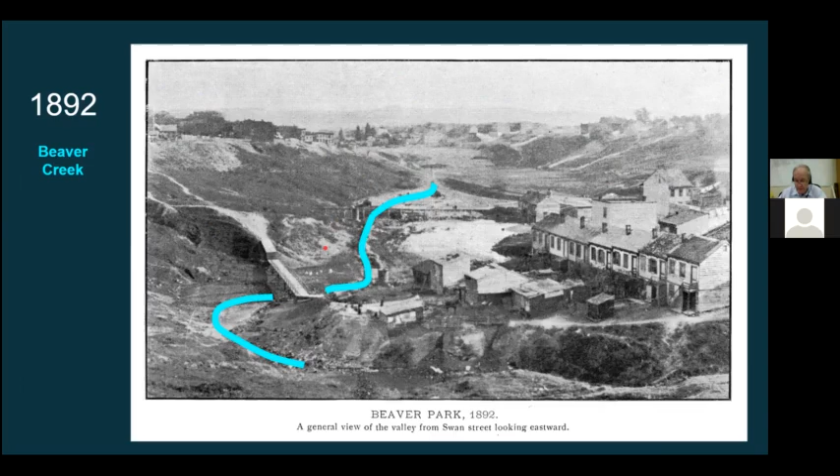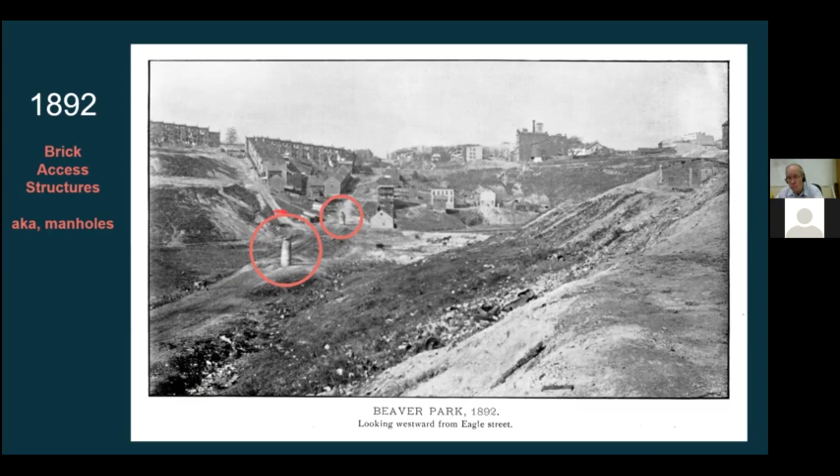And Beaver Park was used as brickyards and breweries and was considered an unsanitary mess by the community. But then look, postcard of Beaver Park. We can see underground, we can see these brick access structures where the beaver kill run has been put underground in 1892. And now we're seeing a shift in sanitation for the region. So now going back to our 1914 postcard of Beaver Park, we see the park not only has become an asset to the community, but featured prominently at the base of this postcard is a stormwater catch basin.

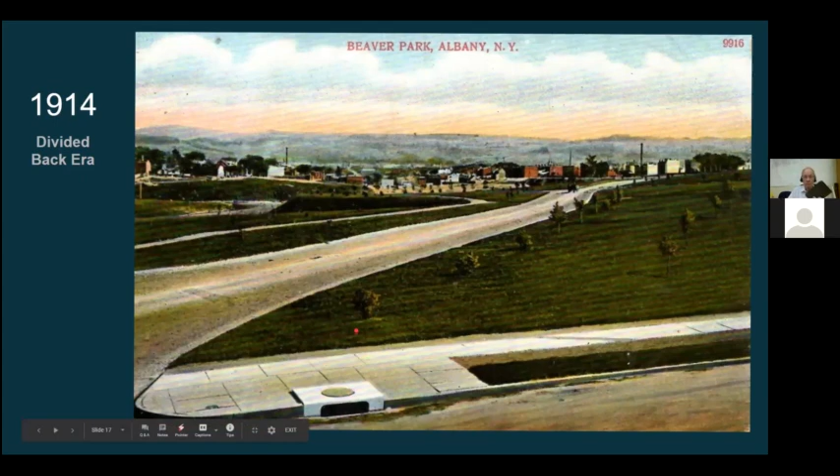Now this catch basin could easily have been excluded from the image, but it's kept on purpose because, like the courthouse and the steamer and the post office, this catch basin is important to the people of Albany, featured on their postcard in 1914. Now see what happens as we move forward in time. We get to 2014, 100 years later, our catch basin's the same catch basin, still cranking away, doing its job, but the world around it has changed.

So the point I was trying to make as we walked through Albany's journey to a modern watershed is that stormwater is an important part of the community here. But now we start Albany's journey to a smart watershed. So we see the same community, their combined sewer trunk line in green. Washington Park, with Washington Park Lake, sits upstream of Beaver Park, which has since been named Lincoln Park.

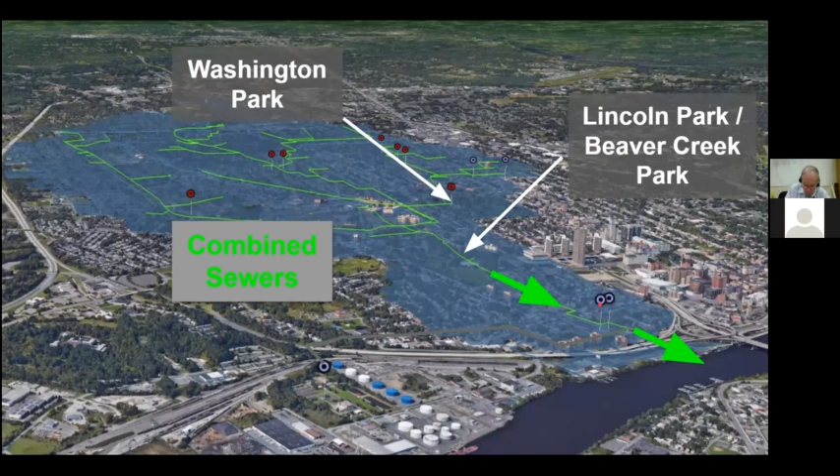We can see that water is being diverted by the interceptor to the wastewater treatment facility. We see a regulator outfalls combined sewage to the Hudson River when flows exceed the plant's capacity. They call this outfall Big C. And this is the most popular one in Albany, again, carrying that 250 million gallons of combined sewer overflow every year.

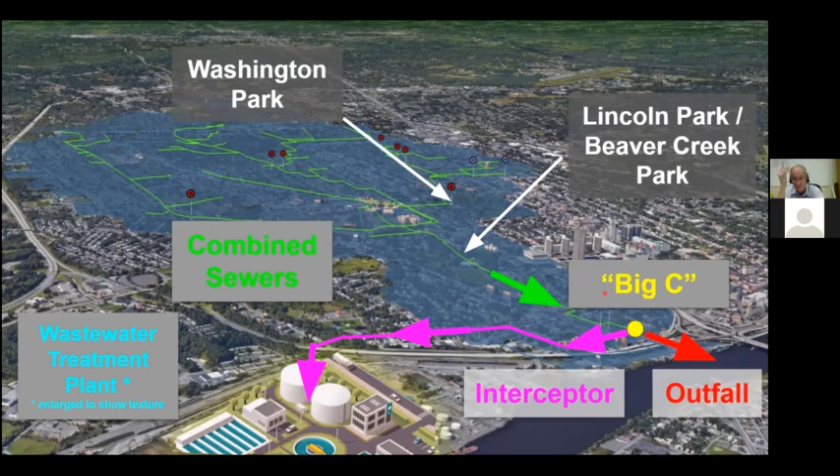And this is what Albany's watershed looks like now. Now, after some consideration, Albany realized there's more they can do with their infrastructure to mitigate flood risk and reduce CSOs. So we partnered with them. We looked upstream at ways to optimize their system. Us, the city, their consulting partners

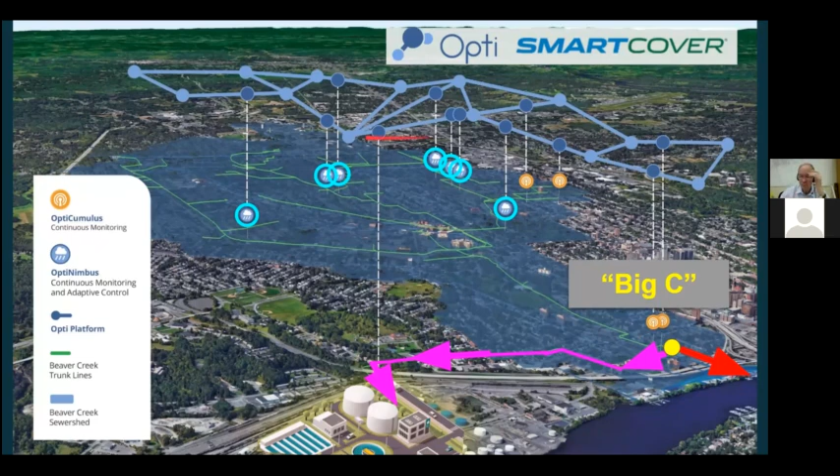identified a number of stormwater storage facilities, including Washington Park Lake right here, that can be controlled. And I'll talk about what I mean by control. I'll also note that SmartCover is a partner of ours. They're monitoring information downstream at the interceptor here, so that information becomes available with the control of these upstream sites.

Now, by control, I mean continuous monitoring and adaptive control, where information is leveraged, like the local weather forecast, downstream flow data from SmartCover, to automatically control the timing and rate of flow through assets like Washington Park Lake.

And the way this works is cloud software ingests the data and information, compares what is currently happening in the system to what has happened in the past and what will happen in the future by calculating runoff and estimating what stormwater runoff is going to enter these facilities. And then the software system drains stormwater facilities in advance of storm events to create capacity by actuating a valve or a gate in real time.

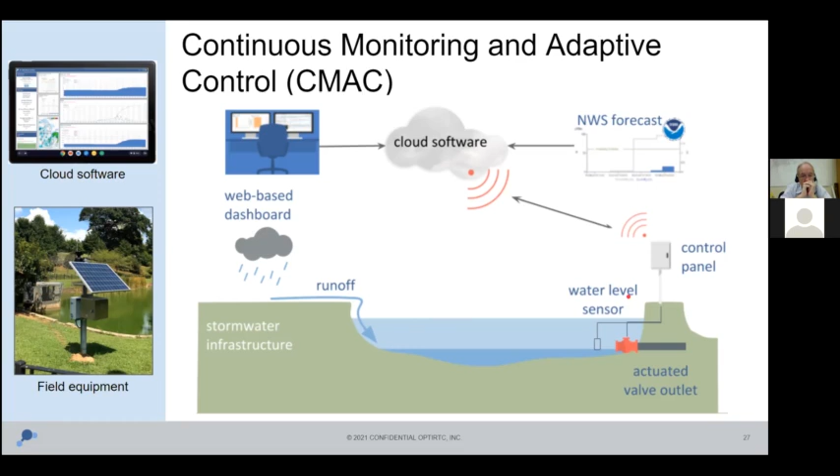So this is how these assets like Washington Park Lake and others in Albany are adjusting in real time and working smarter. Now, the equipment they use is third-party off-the-shelf actuators, valves, and sensors. Some systems are solar powered, others are line powered. And again, this is happening in water and this is happening in wastewater. And we're just bringing this technology into stormwater, like Albany.

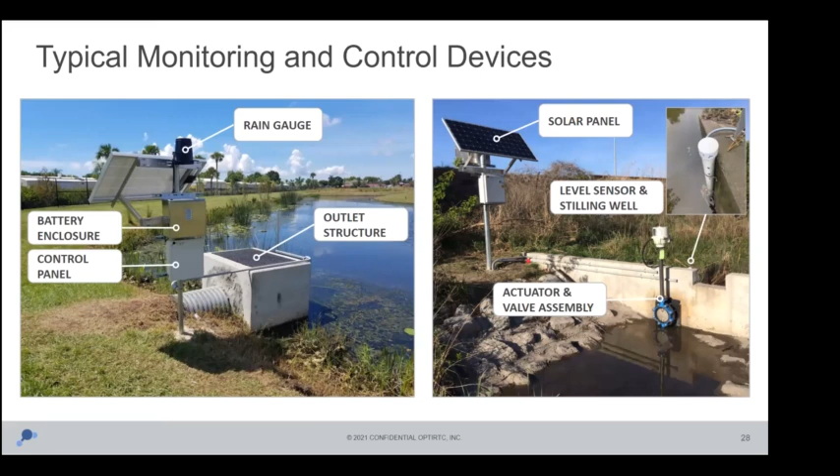The equipment ties into an online dashboard via cellular gateways pushing data up to the cloud. And then this gives operators and communities real-time insights into the performance of their infrastructure. Sites are operated automatically in response to the weather forecast and downstream conditions. So before storm events, a rainfall event enters the forecast period, runoff is calculated, and the sites are drawn down.

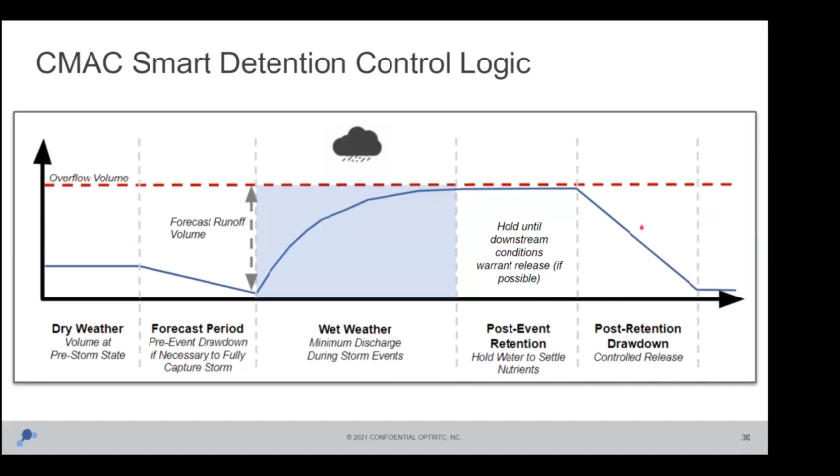During storm events, we're targeting zero discharge out of these facilities, so that, again, it provides some flood risk mitigation and then also gives the downstream system capacity or time to regain capacity, holding water after the storm event, and then slowly releasing during dry weather when the downstream systems can handle that runoff, that inflow.

And the operation seems simple, but there's a lot of complexity that goes into it. So for example, in a 24-hour period, there are 96 weather forecasts, over 4,000 input data points, and over 1,400 control decisions for a single facility. And now this gets multiplied when you have a network of sites working together like Albany.

And because the forecast and the system conditions are always changing, decisions to hold or release water are constantly updated as well. So every 15 minutes when another weather forecast comes out or when site conditions change, the decisions operating these watersheds are changing automatically.

So let's look at Washington Park Lake again. I mentioned this was upstream of the combined sewer and downstream of flooding, where you have flooding happening up here in these neighborhoods in the combined sewer trunk line. Well, now with adaptive controls, the lake can perform both functions, again, these competing functions. They can perform it in an optimized way without compromising aesthetics or recreation of the lake. And that's Albany enhancing existing infrastructure. They're saying, what can I do with the infrastructure I have to get more performance out of it?

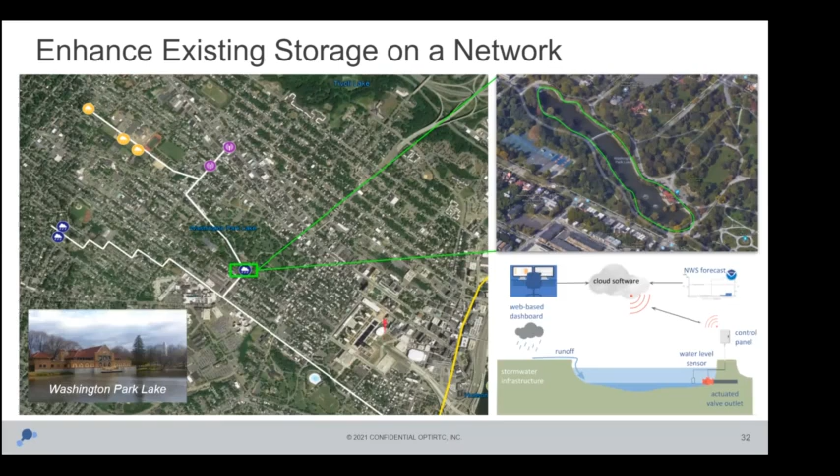Then Albany enhances new infrastructure. So like they have an underground detention basin under a ball field, and they have a constructed wetland in an area that has historically flooded and also discharges into the combined sewer. So by building this infrastructure to be controlled, they were able to optimize the performance for both flood mitigation and CSO reduction.

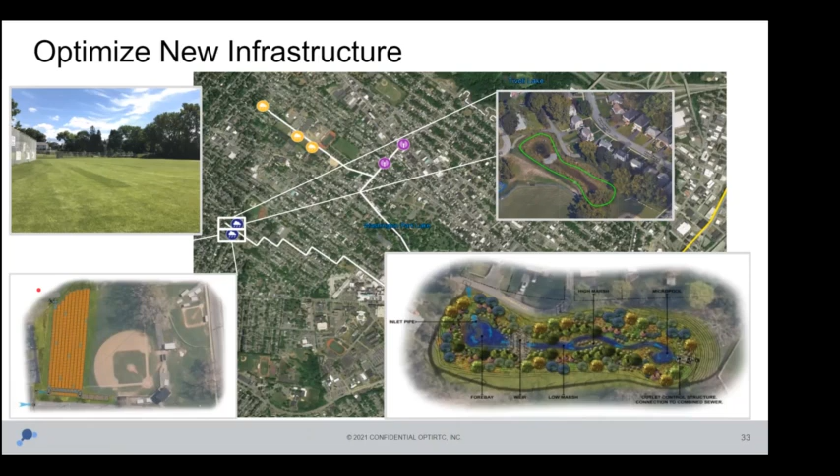And the other thing is now this detention facility can hold water during dry periods, and that water can be used to irrigate the ball field, for example. So it's this multi-use, multi-application infrastructure that's optimized to do more than one thing. And the great thing is it's delivering real results. So specifically, we track wet weather capture at the sites I showed in Albany's network.

Traditional passive infrastructure gets somewhere between 10 and 30% wet weather capture. And it does this by design because the infrastructure, when designed passively, is designed to meet the 2-year, the 10-year, the 100-year storm. Sure, we deal with this all the time, but by design, it's not optimized for any of that. It's designed to work well across a range of storms.

What active controls are doing, what these cities are doing with active controls, are optimizing the performance of these facilities for each individual storm event and saying, can my site be redesigned by changing an orifice size or opening a gate partially to increase that effectiveness? So it's taking this infrastructure from 10 to 30% effective to 80 or 90% effective. And it's doing this without building additional storage.

So they don't have to buy property and build new stormwater infrastructure. So it's a relatively small investment for a significant increase in performance. And in fact, Albany is getting about 100x return on investment here. So for every dollar they spend optimizing their assets, that's $100 they don't have to spend building new infrastructure to

achieve the same outcome. And now that's money put toward improving level of service, or money spent on education or healthcare, or money back in the pockets of taxpayers. I mean, that's improved quality of life that Albany is getting here.

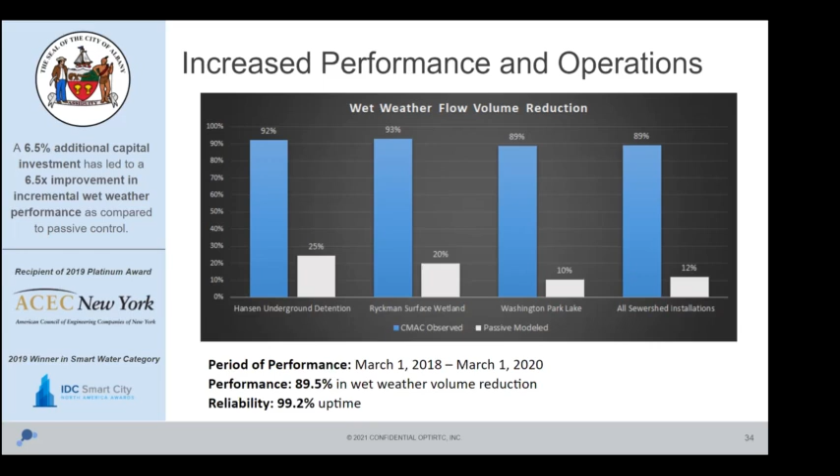So I want to move on to another case study on flood risk mitigation, but Charlene, I know you said this could be interactive. So if anyone has questions, or if there's anything we can talk about with Albany, I'm happy to pause for a few minutes.

I haven't seen any questions come through chat yet. Mostly it was about how cool those postcards were. It's cool, right? A lot of comments about that. I tricked you into watching a presentation on postcards. Well, it's really funny because I have my grandmother's scrapbooks and photos from years, from when she put them all together. And a lot of the writing in those older postcards were all in the front, and I had no idea why. So now I know. Divided back era, law changed in 1907. That is crazy. Okay, great.

Well, I'll move on if there are other questions about Albany. Looks like I do have one question. How would this work in sinkhole type watersheds? In sinkhole type watersheds. So the way this works is really just optimizing stormwater storage. So anywhere that you can store stormwater, you can optimize the timing and rate of release. So if you're storing stormwater in a place that's going to result in a sinkhole for some reason, then it's just something you would have to account for. But yeah, that's it.

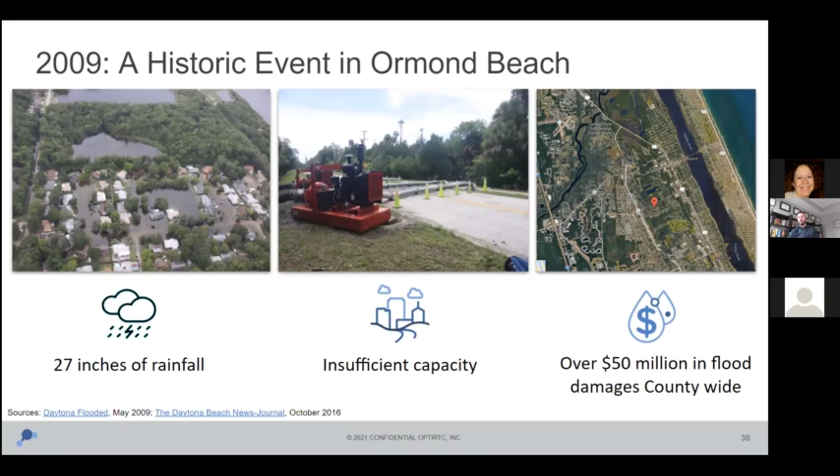Like everywhere else, they're seeing flooding, and specifically in 2009, Ormond Beach got 27 inches in 5 days. Now they've had hurricanes before. 2004 was a bad year, but this one made it clear that Ormond Beach's systems didn't have the capacity to capture the storm that resulted in over $50 million in damage in Volusia County. So again, that was 2009.

Now in 2014, the city looked at their worst hit area, which was around these 5 lakes in Central Park. They were separate lakes until they were connected in this $3.4 million project, which made these lakes into a single flood mitigation system, serving a drainage area of about 550 acres. There's a pump station at the end of Lake One that was a passive pump station at this stage of the project, pumped water into Laurel Creek, eventually to the Halifax River and the Atlantic Ocean.

And it operates like you would expect. When the water level gets above 3 feet, the pump kicks on, typical operation. But it became clear that this pump was not able to manage all 5 lakes effectively to mitigate the flood risk and increase resilience. See, it's these houses right here to the side of the lake that were the ones that were flooded in 2009. So again, the pump station was not made to manage the flow from all 5 of these lakes.

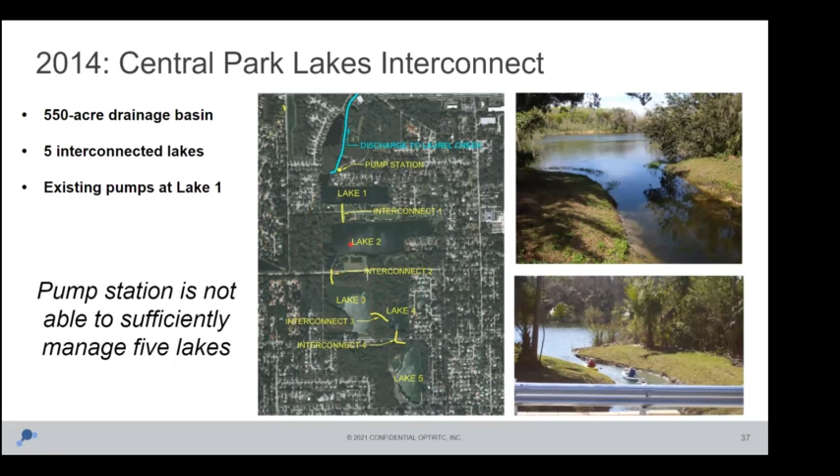So the city and their engineers were faced with a choice. They were either going to build another pump station to manage the lakes, or implement adaptive control software to watch the weather forecast, draw down the lakes well in advance of storms, and enhance their existing infrastructure. The first option was an $8 million investment. It's another large pump station for their community. The second option was about a $200,000 investment, so a significant difference.

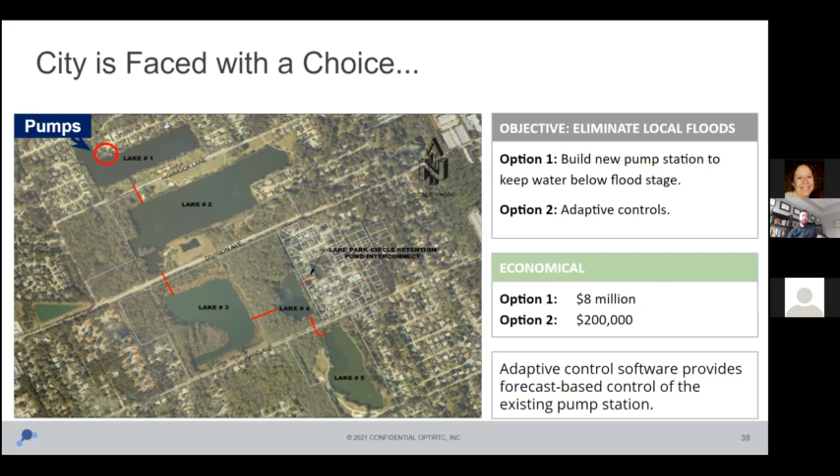So in 2017, the city implemented adaptive controls, like I described in Albany. This detailed site-specific operation was set up with the city and their engineers. There were over 100 different parameters, from watershed characteristics to forecast sensitivity, operational targets, that were established before the system was turned on and then optimized.

Now, this represents a paradigm shift away from the traditional process of model, design, build, and then maintain without any way to go back and change anything, to model, design, build, and optimize. So now we can see the way these systems are working and change the way they're designed just by changing settings in software.

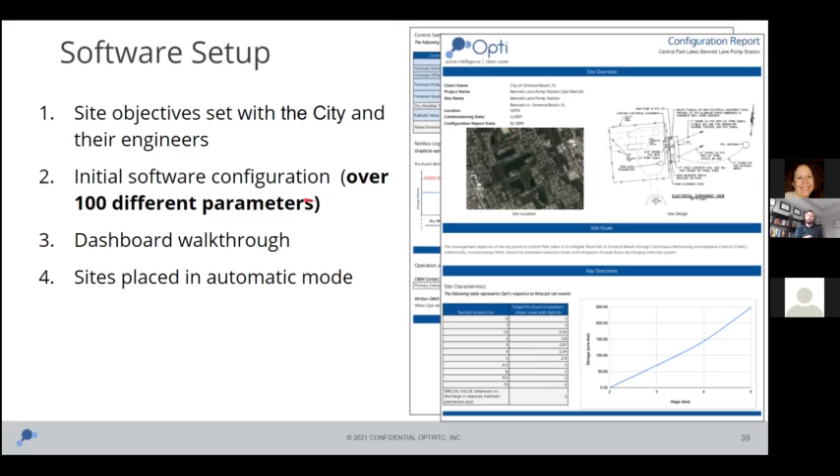And to give you some context on how this works in Ormond Beach, we'll take a look at Hurricane Irma. So Hurricane Irma came in 2017, just 7 months after the adaptive control system came online. Total of about $70 billion in damages, an estimated 82 fatalities. That was followed right there by Hurricane Jose, you can see on the right. I was watching the dashboard, the Ormond Beach's dashboard, that weekend from my home in Boston.

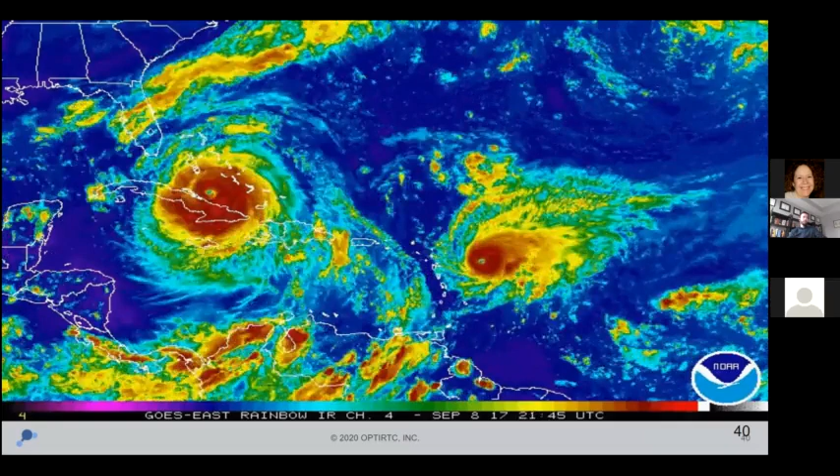And when speaking with the staff of Ormond Beach, they were asking themselves 3 questions. They were asking, what is the status of my stormwater infrastructure? What impact is expected? And how can my infrastructure be better prepared? And the great thing is they were able to get these answers by looking at their online systems.

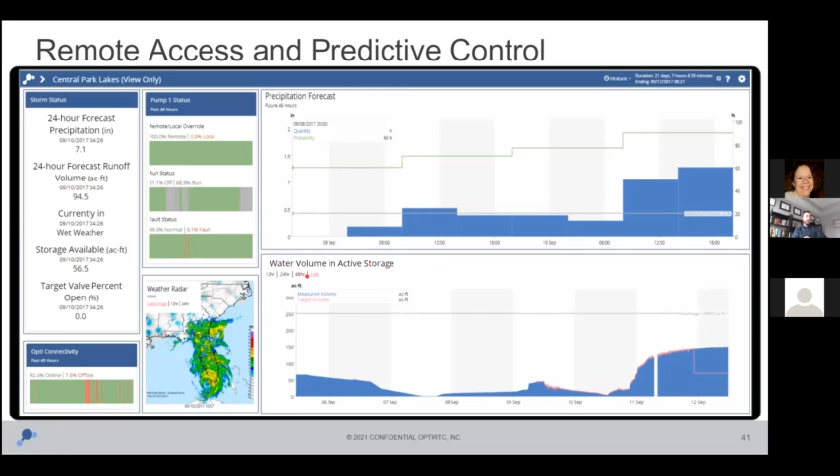So they saw the storm, they saw the status of their pumps, they saw the forecast and how it was evolving every 15 minutes. They saw they were expecting a runoff of 94 acre feet in 24 hours, to give you some context for this system. And they only had 56 acre feet available in storage. And they saw the pumps kick on to prepare for the storm. So the lake drew down 70 acre feet. They received almost 9 inches of rain, and the result was no flooding at the lakes.

And tracking the storm, looking at what did happen, in blue with adaptive controls versus what would have happened based on traditional operation, we see that the system likely mitigated flood risk. There would likely have been some flooding had the system not been kicked on and put into the pre-event drawdown.

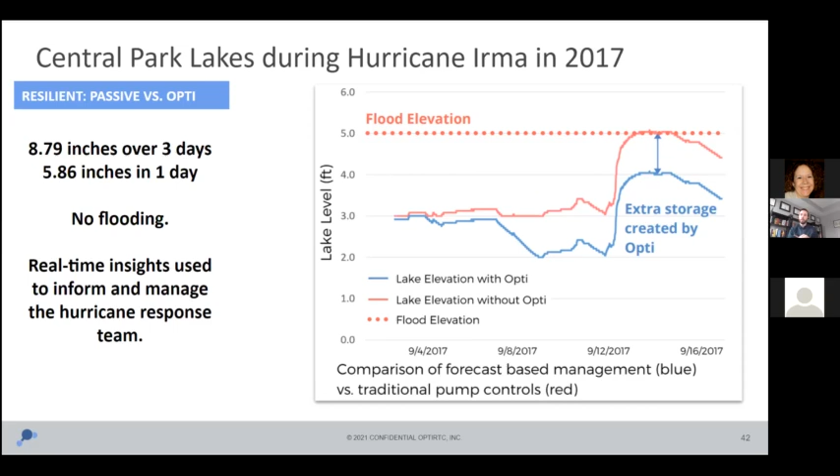And the biggest thing is now the city employees, this is what they were telling me afterwards. This is huge. The lakes were able to prepare, but the biggest thing is that the operators could see this and know what was happening remotely and really understand what was going on, so they could put their people, their most critical resources, to other areas of the city to prepare for this storm event, because they knew that the system had their lakes under control.

After Irma, the city decided they wanted even more visibility, so they added 2 upstream monitoring stations and 1 downstream of the pump station. They're monitoring water level and temperature using lightweight solar power telemetry. Trends are being tracked online. Data from each storm event is automatically identified and separated for easy analysis.

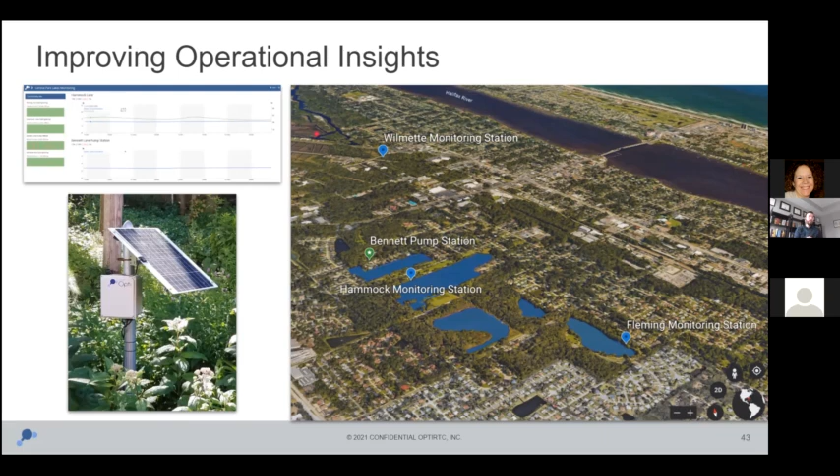So now before storms, the city can go back and check how their system responded to past storms with similar characteristics. So they can see, I'm getting a 3-inch storm event or a 4-inch storm event. How did my system respond to past storm events of similar characteristics, and does anything need to be changed? And the city did that before Hurricane Dorian in 2019.

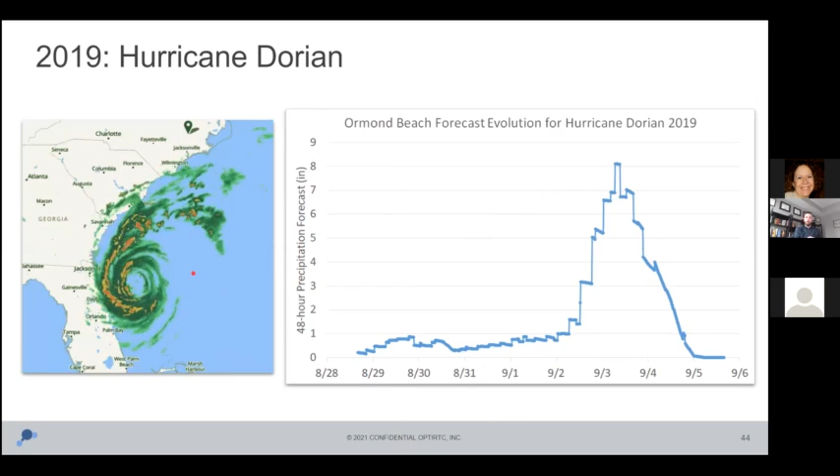So what I'm showing here on the right is the forecast evolution for Dorian in Ormond Beach. And at one point, it looked like the city was going to get another 8+ inches. Now, for those that remember, this storm had largely skipped Florida and headed up the coast, still resulting in $3.4 billion of damages. But Dorian was different for the city of Ormond Beach because they were much more aware of their capacity to take manual control of the lakes.

So coincidentally, I was in Florida meeting with Ormond Beach and a few other communities on August 29th before the storm. And the city engineer took manual control of the facility and drew it down as a demonstration, and then decided to bring the lake levels down slightly. And then the next day, August 30th, even though the lakes were forecast to have enough capacity, the city engineer drew them down because of some political pressure to avoid flooding, and Dorian looked like it was headed for them.

And even though the hurricane turned and Ormond Beach only received 2.5 to 3 inches of rain, this system gave the operators in the community peace of mind to know that their lakes were prepared. So the outcomes of this project really boil down to 3 things. One is economics, so saving in capital and operating expenditure by the city, enhancing their existing assets before building new.

Resilience, so the city created 70 acre feet of active storage capacity that's used to protect the community. It's almost the equivalent of building another 70 acre feet in storage. I mean, talk about Texas or other locations. It's difficult to find 70 acre feet of new storage. The city was able to do that with their existing facility. And then lastly, peace of mind. I mean, turning data into information and actionable insights.

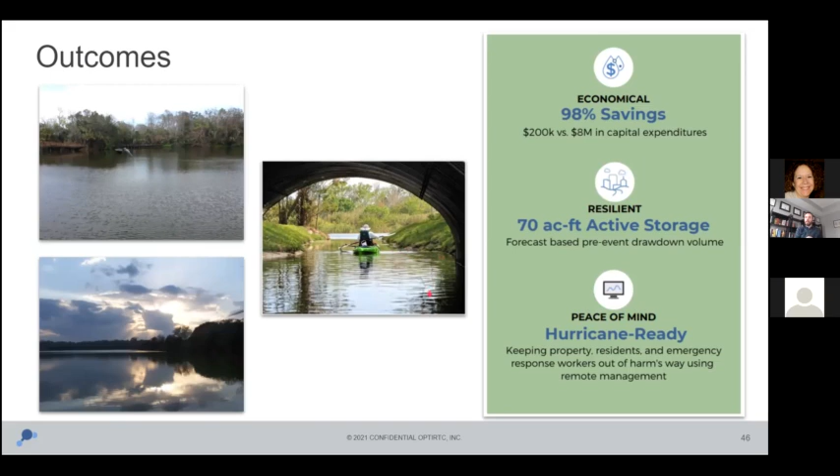So I have one more case study. Again, I'll pause here if there are questions about Ormond Beach or Albany or anything that's come through that we can discuss. I don't have any questions. I just had a comment that said I'm really excited to see more of this technology be applied to stormwater infrastructure.

Okay. That's all I have so far. Shoot. I muted you by accident. There we go.

All right, let's see if that works. It sounds like we're good.

All right, well then I'll go to the next case study. We've covered sewer overflows, we've covered flooding. I have this one more case study. It's on water quality and flooding. You'll see there's a multi-use application here in pretty much all of these case studies.

But someone did ask: where has this system been installed in Tennessee? So this system has been piloted by the city of Chattanooga years ago. So we did do a project there before Opti was even a company. Actually, there may be some folks from Chattanooga on the line, but I didn't really give an intro to Opti since this is more of a technical discussion about the benefits.

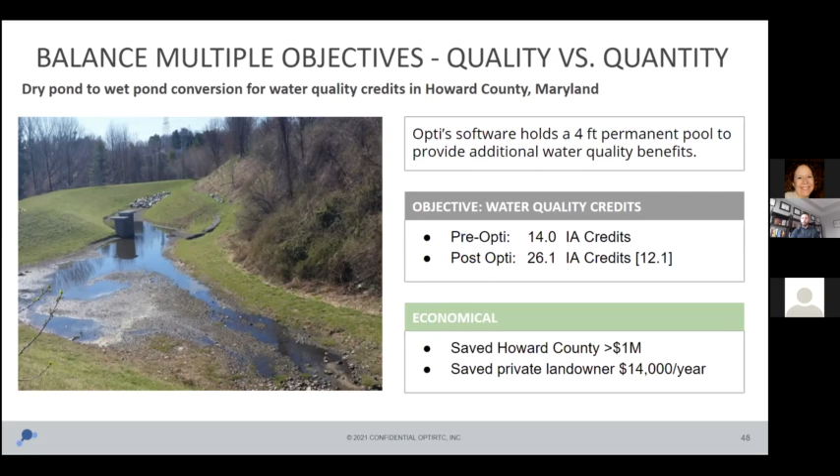And because this pond is on private property, the landowner also receives a stormwater fee reduction of about $14,000 per year. On the side, in Maryland, we've recently done a dry pond study where if you take dry ponds and you put active controls on them, they perform just like wet ponds without compromising any of the flood risk mitigation benefits, which is huge. I mean, think about Tennessee. If there are dry ponds out there providing flood risk mitigation, those ponds could be doing a lot more for water quality or sewer capacity issues with adaptive controls.

And the way this works for water quality is we talk about holding water during and after storm events. That increases retention time. And that retention time increases nutrient settling and improves water quality. So the water that's being discharged from these sites is either clean water before storm events because it's been sitting there for days, or clean water 24 to 48 hours after storm events. Again, because we're holding water during that period and allowing these sediments to settle out.

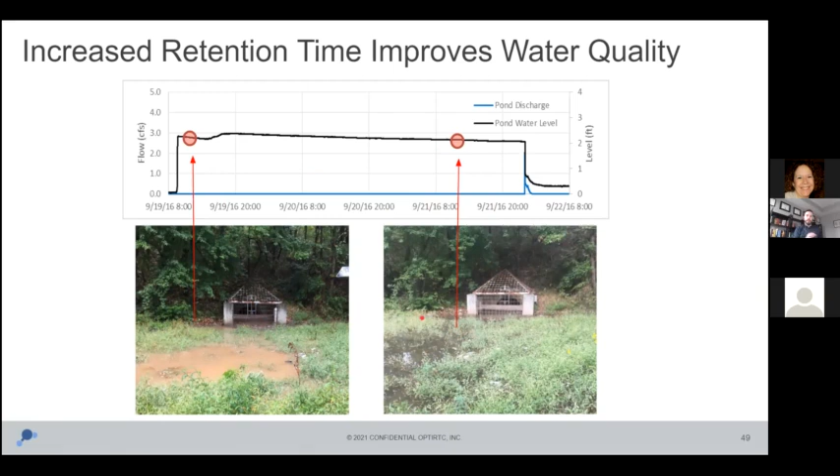So you can visibly see this. This water on the left, under normal conditions, would be discharging downstream during and right after the storm event. But if you hold that water for 2 days, it's much cleaner. So that's how you can get significantly improved water quality with adaptive controls.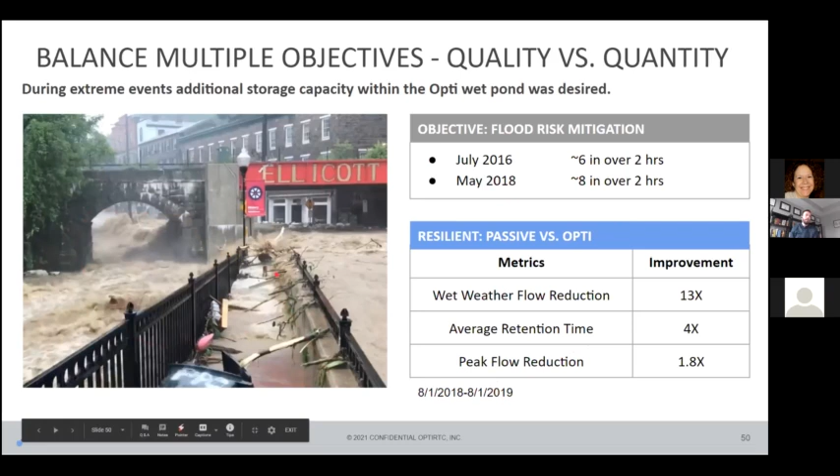But in addition to water quality, this site needs to provide flood risk mitigation as it's directly upstream of Old Ellicott City, pictured here. And Ellicott City, for those that tracked it, experienced back-to-back 1,000-year storms in 2016 and 2018, causing significant damage. Now with adaptive controls, this site was able to reduce wet weather flow by 13x and reduce peak flow by almost 2x. And then it also increased the retention time for water quality by 4x. So again, significant damage, a lot of focus here on flood risk mitigation, a lot of focus on water quality and getting both of those benefits.

Now, as you can imagine, the county, Howard County, takes safety very seriously with these controlled stormwater infrastructure upstream of heavily flooded areas. So 3 types of fail-safes were established. And this is the same for all of our projects, but I'll show it here for Howard County. The first fail-safe type is cloud-based. So say if there's a clog in the pond or a sensor stops reading, alarms are sent to operators via email. Operators can then log in via their desktops and take remote manual control and, say, toggle a valve open and closed. Other interesting ones are the fact that the data and the information is housed in 3 redundant data centers, the locations of which are not disclosed to prevent cyber attacks and bolster cyber resilience.

And then you can go into mechanical fail-safes. So that's the second type, where an on-site battery backup and local fail-safe logic exists in case the site is cut off from the cloud. So there's enough local intelligence to still revert to a fail-safe position. And then finally, there's civil design. Civil design acts as a passive overflow. There's always a passive overflow to make sure water can safely pass.

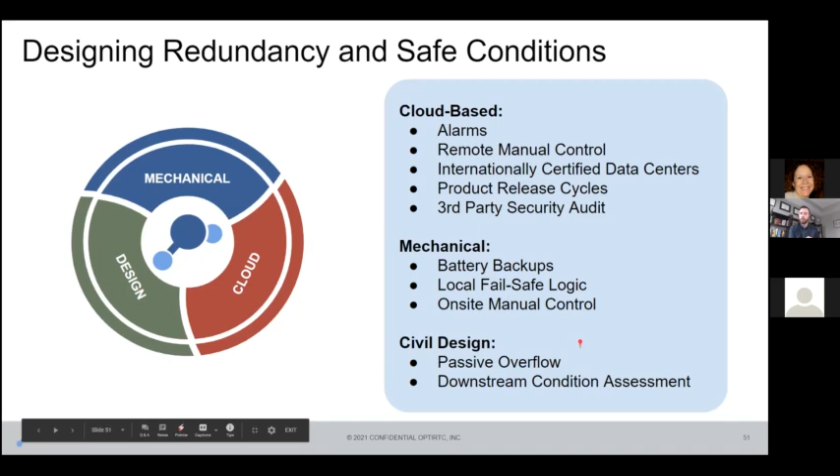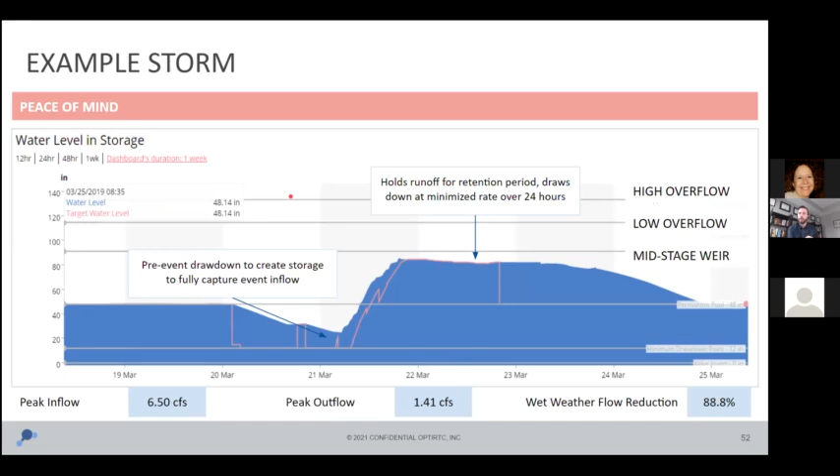We can see the operation by looking at the dashboard from a storm last year. So we can see the site do pre-event drawdown, and then the storm come in, and then the site do post-event retention and hold water for 24 hours. And again, the point here is it gives operators peace of mind that their infrastructure is working as planned.

And again, really what Howard County and Albany and Ormond Beach and all these other communities are doing is just enhancing existing practices. So this isn't a new BMP. It's really just a way to maximize the benefits across applications for already widely used infrastructure, like ponds and underground vaults and wetlands and other systems, by making them work smarter, not harder. So it's a way to optimize all of these applications without having to build separate infrastructure.

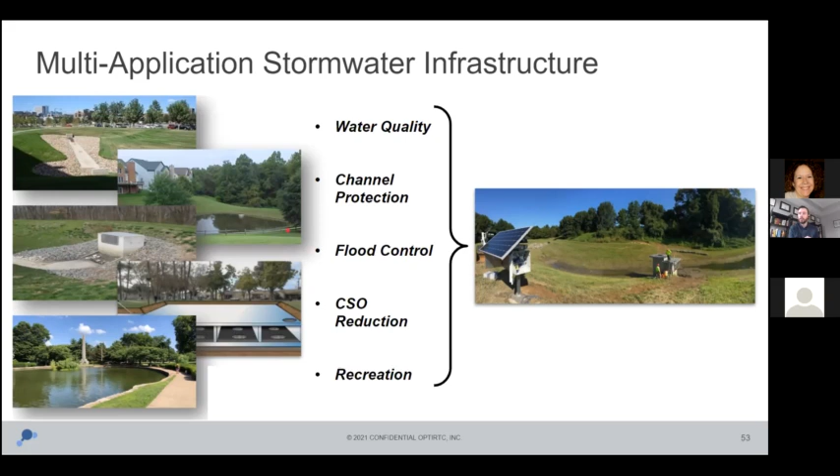And I'll just note that it's delivering more than stormwater benefits. I mean, the real benefits are the economic and the resilient and the peace of mind benefits felt by municipalities and the community members that they serve. And this really ties back to improving quality of life, which is what we're here for.

Other than that, I'd love to have some discussion, or if there are other questions or thoughts on how this works in Tennessee.

I did have a question that says, are these systems automated, or are there operators who run them? That's a great question. These systems are fully automated. So the operation of these systems is configured into the software up front. So Opti will sit down with your engineer and your municipality and discuss the way that these systems are going to operate, and then build that operation automatically into the software. So some clients will never log in and change anything, and their systems just work. And there's a team of people at Opti that watches them to make sure they're doing what they're supposed to do.

But completely automated. Others are more hands-on, and they might want to log into their dashboard and change the operation. They're also really helpful for maintenance. If you want to drain ponds or lakes or vaults down in advance of some maintenance, you can do that remotely without going on site, but all fully automated.

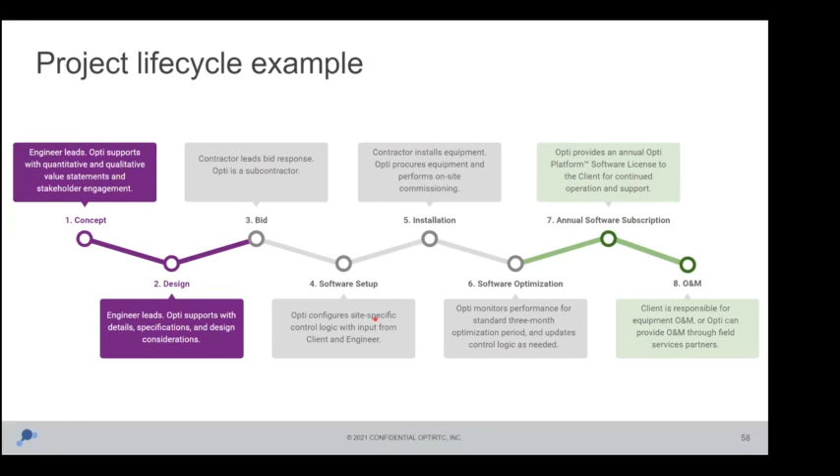And then installation. So sensors have to be procured, actuated valves have to be procured, controllers have to be bought, solar in some cases. That can come from Opti, so we resell that equipment, or it can be purchased separately. But most clients will buy it directly from us, and then we configure some of that specifically for their site. So we'll configure an actuated valve and a sensor to work with our control panel. And that's the way it gets deployed.

And then there's a software optimization period. So again, I mentioned that we're looking at how these sites are performing and changing the software settings. And then there is an annual software subscription, similar to what you would pay for Microsoft Office or ArcGIS. They're paying for the software license that not only operates all of their sites, but it also brings in all the analytics and the data storage and the support from Opti staff.

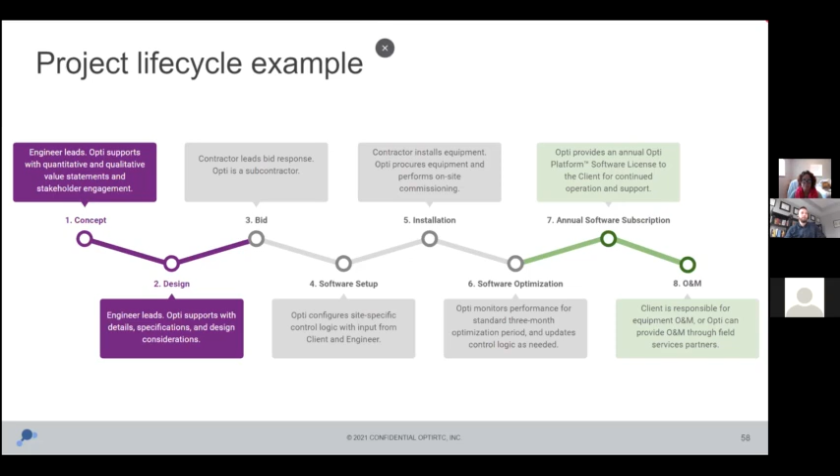Let's see. Can you talk a little bit about experiences working with public and private partnerships to install controls on private property, legal barriers encountered, and how these were addressed? Yeah, certainly. So on private property, it comes down to what the drivers are. What's the reason that this private property owner would do this project? So in Maryland and in the Chesapeake Bay, there are drivers around stormwater fee reductions. So sometimes we would do these projects on private property where we might have to get a letter of intent or some other contract where we can optimize their site, and then the benefits can be sold back to a municipality or a government entity.

So I can give you another example. Maryland Department of Transportation, they have a requirement to generate water quality, and there's a market in Maryland. So we actually work with private landowners in Maryland to develop projects on private property and sell those credits back to MDOT. And then those credits have to be verified by third parties. They're verified by Maryland Environmental Services, and the practices have to be approved by Maryland Department of the Environment. So it's just something we have to look at.

Now, some cities have a process in place for taking over ponds on private property. So there, it could work very well. If the city takes over the pond maintenance, for example, then they could put adaptive controls on private property.

Great. Any other questions? Anyone have any other questions at all? You can also unmute and ask if you would like to. Nobody?